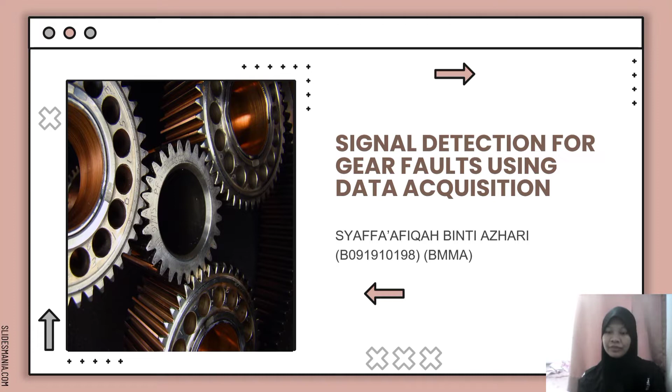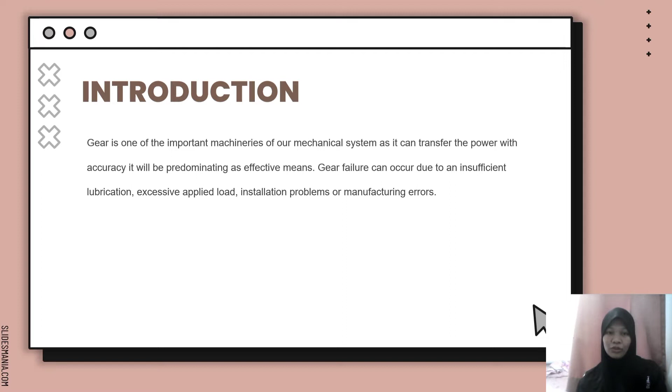My project title is signal detection for gear fault using data acquisition. So, introduction: gear is one of the important machineries of our mechanical system. As it can transfer the power with accuracy, it will be predominating as an effective means. Gear failure can occur due to insufficient lubrication, excessive applied load, installation problems, or manufacturing errors.

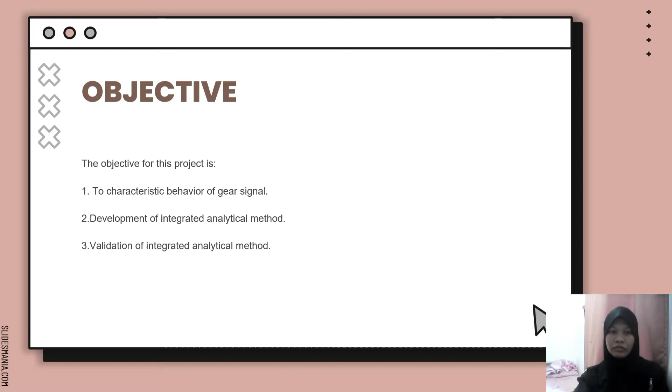The objective for my project is to characterize the behavior of gear signals, development of an integrated analytical method, and validation of the integrated analytical method. The scope is to compare the difference between vibration signal and sound signal in gear fault detection using data acquisition, which contains some simulation using MATLAB. Second is to identify which signal is normal and abnormal for gear. So we will use a healthy gear and a faulty gear.

And then the new solution is using sound signals, usually obtained by microphones, which are considered contactless sensors, compared to vibration signals that use sensors like displacement sensors and velocity sensors.

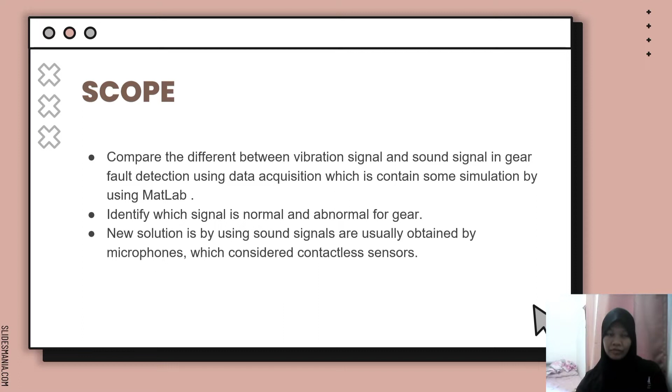For literature review, I put some operation of gear: when one huge gear is connected to a small one, the big gear can be turned slowly while the small gear rotates swiftly. One gear can accelerate the rotation of another, but it can also cause it to rotate the other way. A gear train is when two or more gears are linked together. The gear turning is known as the driver, and the gear trying to move is known as the driven.

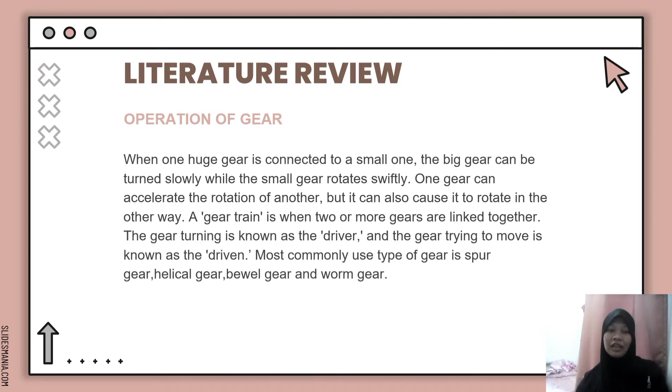The most commonly used types of gear are spur gear, helical gear, bevel gear, and worm gear. So this is the literature review. I put 4 different journals. The first journal is the effect of the operating condition and tooth faults on gear vibration signals. The objective is the effect of the operating condition on the vibration signature. Second, the behavior of tooth faults in the vibration signature. And third is improving the detection capability based on the understanding of the physical phenomena.

The method is a realistic non-linear dynamic model used to predict the vibration regime of spur gear transmission. For the result, the RMS and kurtosis level of the damage condition are higher for the heavier load. The model allows to simulate each combination of rotational speed, load, and surface roughness, and to isolate its influence on the dynamic response. The first journal's author and year is 2021.

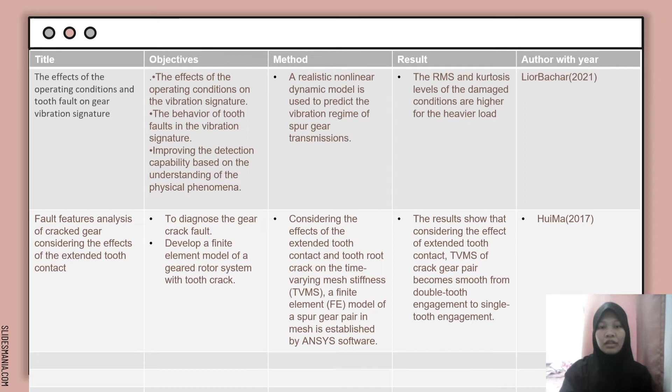The results show that, considering the effect of extended tooth contact, the TVMS of the cracked gear pair becomes smooth from double tooth engagement to single tooth engagement. This journal is from 2017.

The third journal is gear fault model and dynamic based modeling for gear fault detection. The objective is a gear fault detection procedure using vibration signal analysis and presenting different gear failure modes and their models. The method is applied for gear tooth fault detection using vibration analysis with an emphasis on tooth fault modeling and dynamic simulation.

For the result, the finite element method (FEM) has been applied for calculating gear mesh stiffness, and it's easier to extract the time varying mesh stiffness (TVMS) using the analytical approach, and this approach has produced results which in many cases have shown good agreement with those obtained with the FEM. The FEM requires the modeling and simulation of the problem for each specific tooth fault size. So the analytical approach requires less computation time than FEM.

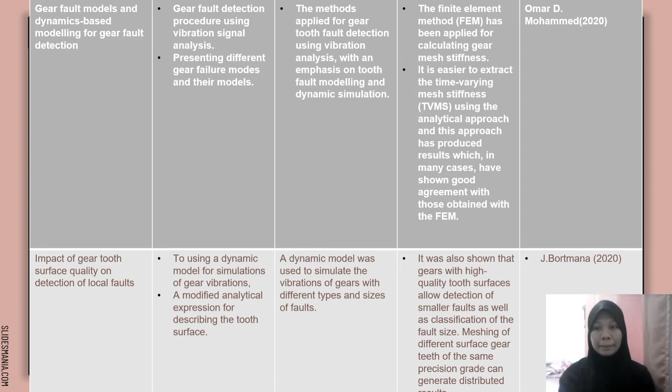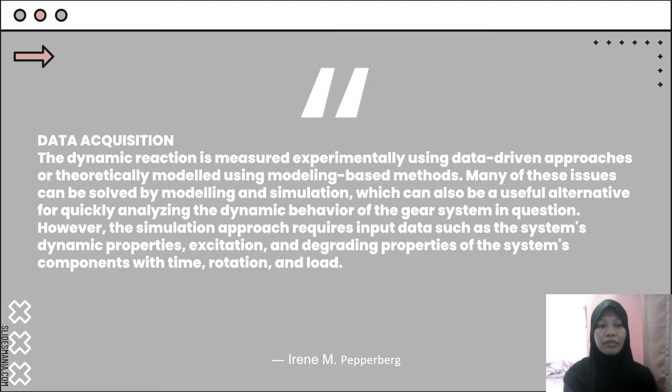The next slide is about data acquisition. The dynamic reaction is measured experimentally using a data-driven approach or theoretically modeled using a modeling-based method. Many of these issues can be solved by modeling and simulation, which can also be a useful alternative for quickly analyzing the dynamic behavior of the gear system in question. However, the simulation approach requires input data such as the system dynamic properties, excitation, and degrading properties of the system components with time, rotation, and load.

Okay, for signal analysis, a signal is a series of numbers derived from measurements that are usually obtained using a recording method as a function of time. We usually play with time domain and frequency domain for analysis. Time domain is the time based analysis of physical signals, mathematical functions, or time series of economic or environmental data. An oscilloscope is a common tool for viewing real-world signals in the time domain.

Frequency domain is a method of analyzing a signal or mathematical function in terms of frequency rather than time. A frequency domain graph shows how much of the signal is contained inside a certain frequency band throughout a range of frequencies. The next slide is the difference between time domain and frequency domain in a graph.

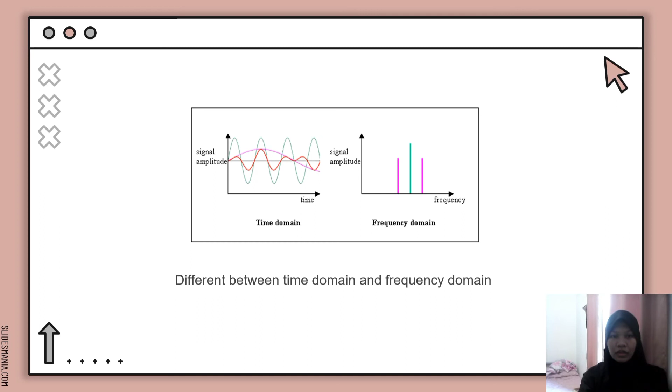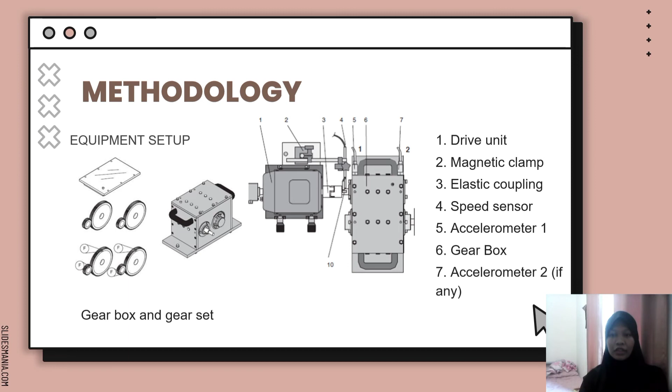For methodology, the equipment setup needed is first a drive unit, second a magnetic clamp, third an elastic coupling, fourth a speed sensor, fifth an accelerometer, next a gearbox, and a second accelerometer if needed. For general setup, speed needs to be set at 1200 rpm. Number of teeth on the small wheel is 25 and number of teeth on the large wheel is 75. Engagement frequency is the number of teeth multiplied by running speed.

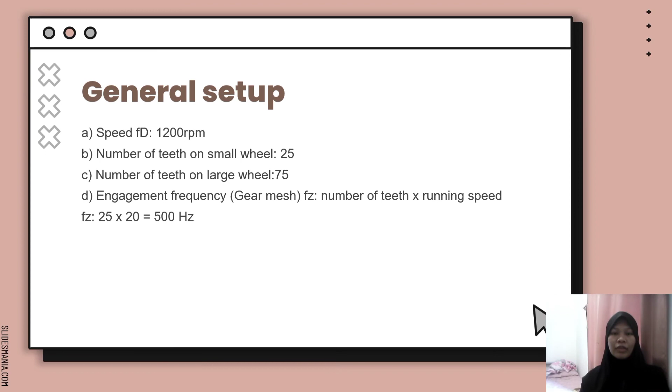For normal gear running, first check that all parts are fit securely. Then close the protective hood. Switch on the control unit for the motor and set the desired direction of rotation. Then we set the speed to 0 and switch on the motor. Then set the speed to 1200 to 1500 rpm and switch off the brake and load unit control or set the load to 0.

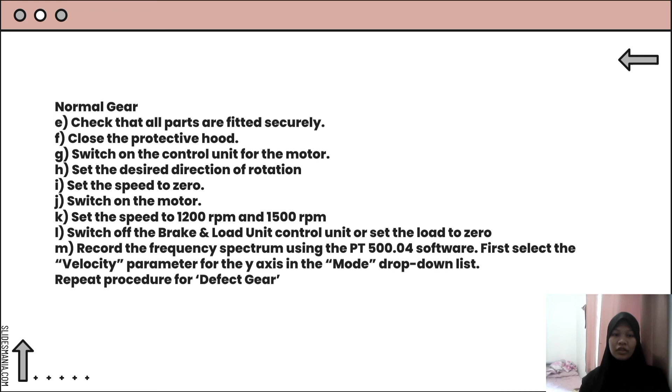The last step is to record the frequency spectrum using the PT 500.04 software. First select the velocity parameter for the y-axis in the mode drop-down list. For testing the defect gear, just repeat the same procedure as the normal gear. The simulation is run in MATLAB. MATLAB is used to evaluate and build systems and products. By building some code for this project, MATLAB will process the signal for normal and abnormal gear.